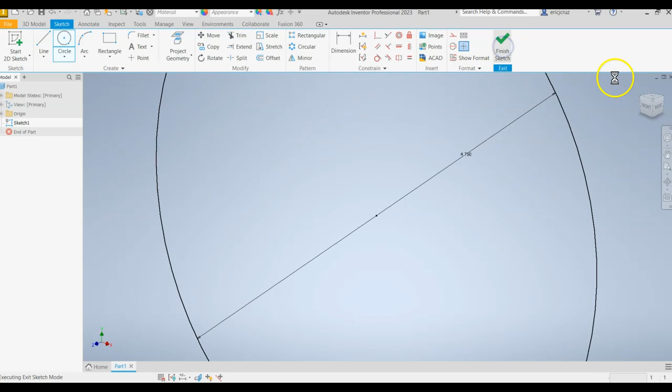I'm going to click Finish Sketch, click Home, and extrude that by its thickness. My menu popped up on the wrong side, and that thickness, distance A, is 0.62. Click OK, and now you have the base.

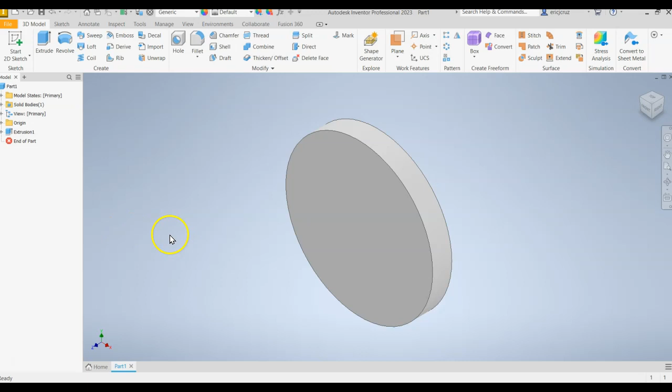Let's go ahead and cut out that hole in the center. Right click New Sketch on that surface, click to draw a circle, and that circle is 1.37. Go ahead and Finish Sketch and Extrude Cut through all.

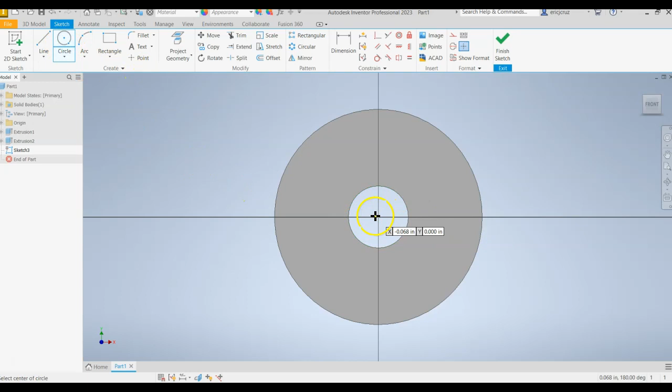Again, New Sketch on that surface, and this time we're going to click Point. So find the point, and from the center out we're going to click Circle. We're going to click on the center, and that circle, this new circle, is going to be 3.38, and this is the alignment circle for where we're going to put points.

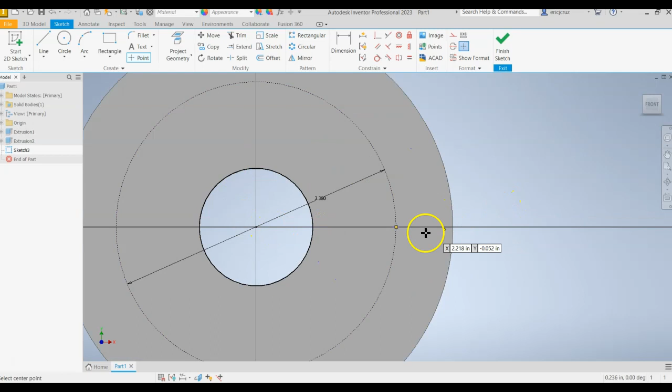Right click on that circle and click Construction, and it'll get dashed. Now click Point, and then click where it aligns with the center. If it doesn't align, click on that point again and click on the center, and it should align. It's hard to see on screen because it's so small, but that point should be horizontally aligned with the center mark, and it should be 3.38 in diameter along here.

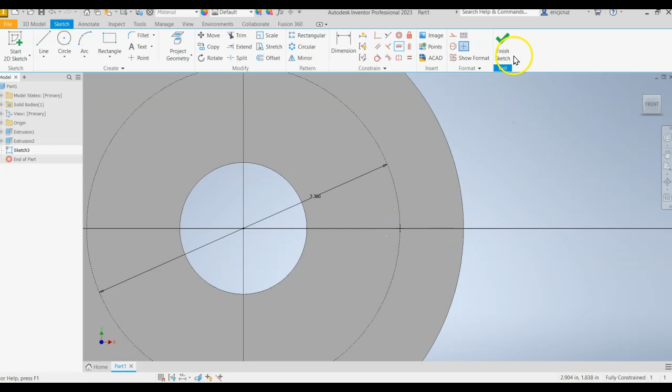Now I want to show you something called the circular pattern. I'm going to click Finish Sketch. Now you only should have one point, because I want to teach you a skill.

Before we do that, let's go ahead and click Hole. You'll notice on the technical drawing it says 0.38 through with a 0.75 counter bore, going 0.30 in. So that counter bore is here, this diameter right here is the 0.75. Then the distance, the little arrow pointing down, is 0.3. And the diameter for the hole going all the way through is 0.38.

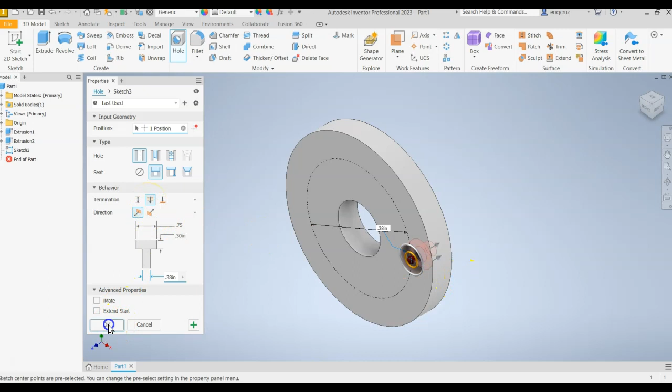And yep, it should say through all. I'm going to click OK. I'm holding Shift and I'm clicking. So that's what it should look like.

Now, the part I wanted to show you was this button right here, Circular Pattern. I'm going to click Circular Pattern. It lets you click on the feature, so we want to click on this feature, and then you have to click on this button that says Rotation Axis. The rotation axis is going to be one of the circles, and you'll notice it's trying to put a pattern here, and it says Placement. So we only want 3, we want to add 2 extra.

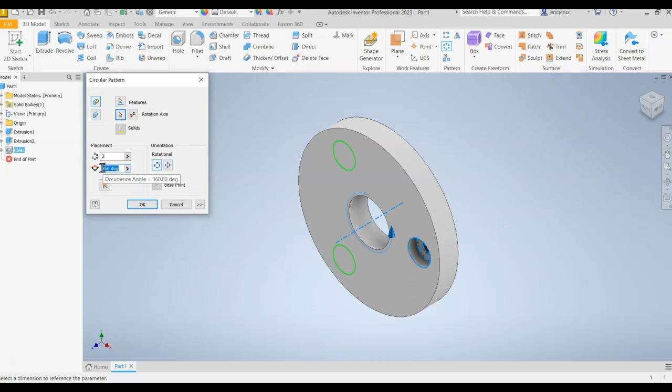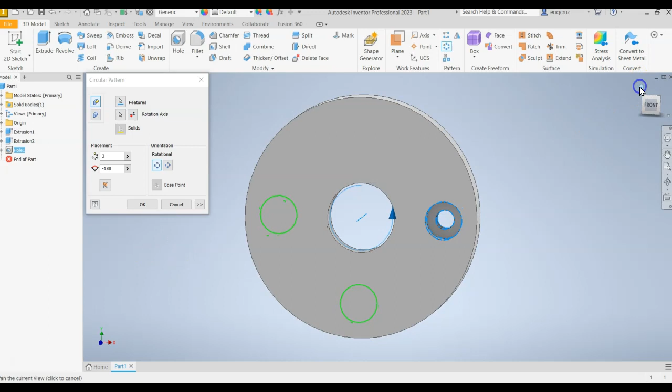3. And the angle, I believe is... let me look at that. Yeah, there we go. Depending on which way this is going, it's either going to be 180 or negative 180, because we want that feature aligned with this vertical and then aligned horizontally on this side. Click OK, and now when I click OK, you'll see it pops in those features.

So that is circular pattern. You should definitely know how to use that. It comes up in the NOCTI exam. It comes up in the Autodesk Inventor exam.

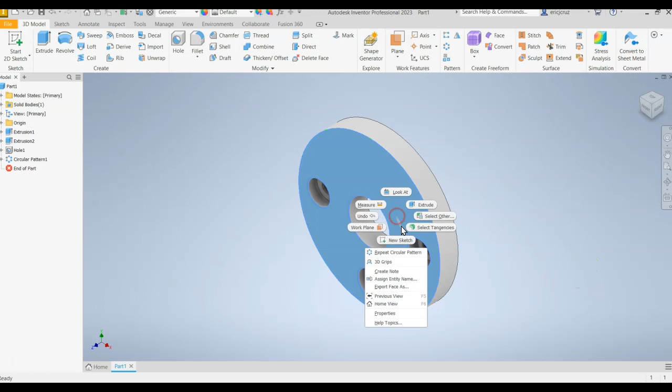Now we can move on by making some of the other parts. Go ahead and click New Sketch on that surface again. We're going to project the geometry of the surface. I'm going to click Circle, and the outside diameter of this circle is going to be 2.

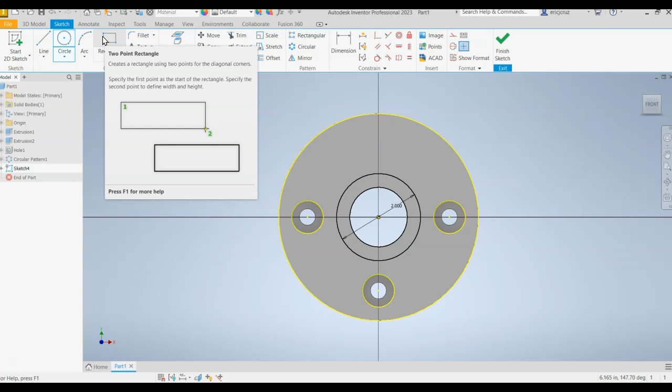And then I'm going to actually, yeah, just leave that like that. So finish sketch. We're going to extrude that ring shape outward, and we're going to do some subtraction here. Well, actually, we know what it is, just 2.

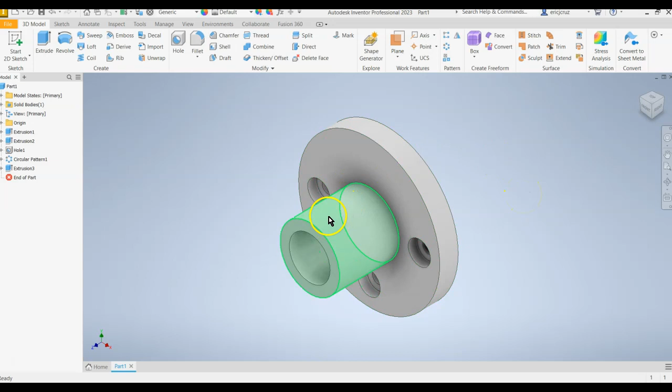So now that you have that cylinder extruded, we can go ahead and cut out that keyhole shape from the backside of the plate. We're going to right click new sketch on the backside, and we can project the geometry of the surface so all of these circles are highlighted.

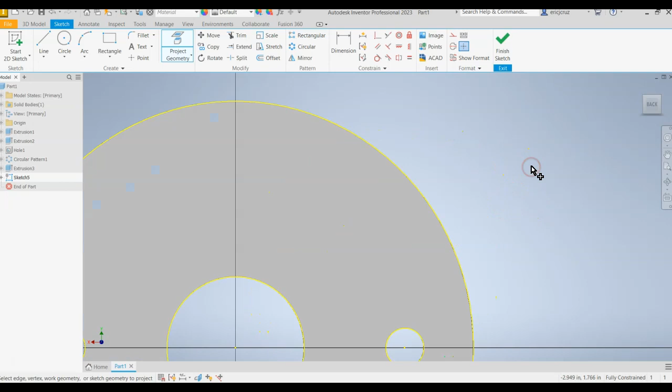Here's where things get a little tricky for this part. Click on the rectangle tool and draw a rectangle like that. Then click dimension, and the length between the two sides is going to be 1.12. And then from the center mark to the top of that rectangle, it's going to be 1.24.

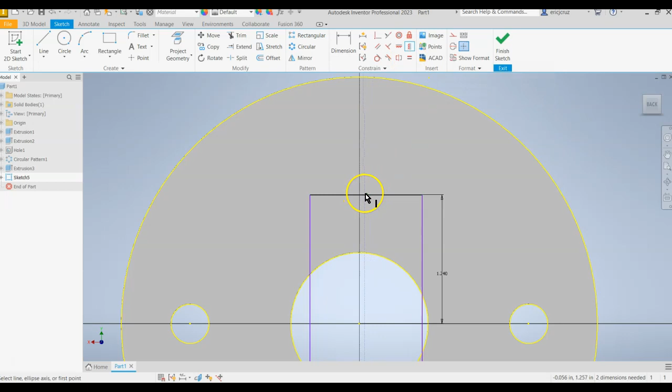Okay, and then we need to align the midpoint. So I'm going to click on vertical align, the vertical constraint. Let the mouse highlight the middle constraint, I'm going to click on that. And then the center mark, and it should snap it into place, just like so. I'm going to tap escape.

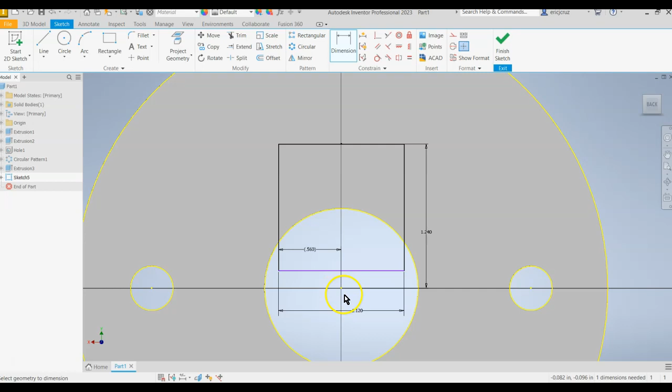Okay, so you should have this shape right here that's going past the circle. And if that did not work, click dimension, click on the side here, and then the center mark, and that should be 0.56 from the edge to the center mark, with a total length of 1.12 and a height of 1.24. The radius, we're going to put that on as a fillet afterwards.

And then we have a circle. So what I did was I clicked circle, I let it snap to the midpoint so I get that vertical alignment, and then click above it. I need to change this to radius. I'm going to right click and click radius, and the radius for this is 0.24.

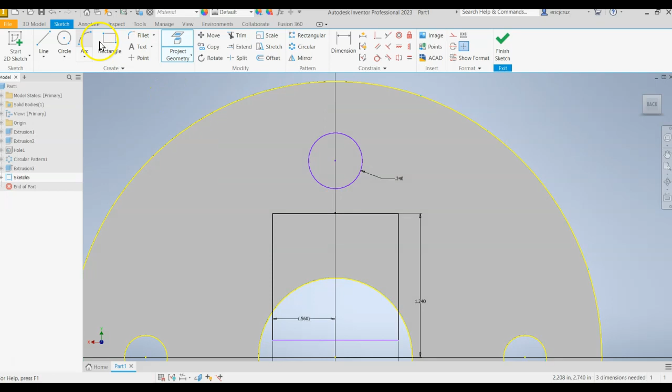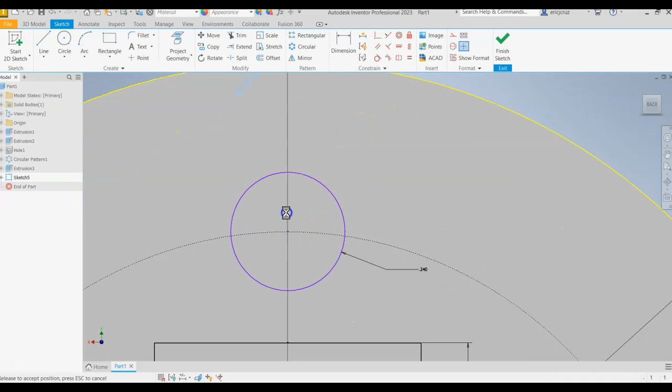Let me click on project geometry because it looks like I lost my line. That 3.38, I need that back. So I'm going to draw a circle, make sure that that dimension is 3.38, except I'm going to right click on it and tap escape. Oh, look at that, so this should snap to right here. Okay, if that didn't work, click dimension, click the circle, click the center mark, and that should be 1.69.

Okay, and now we need lines. So we're going to need some vertical lines. Make sure they're vertical, and make sure they're tangent to the circle. I click line tool, draw line, click the tangent button, click this line, click the circle. That circle should not move from that position.

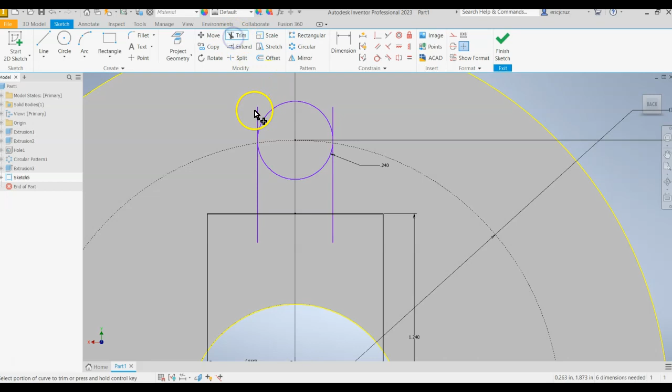I'm going to click trim. I'm going to trim off these lines because we don't need them. Oops, click trim. There we go.

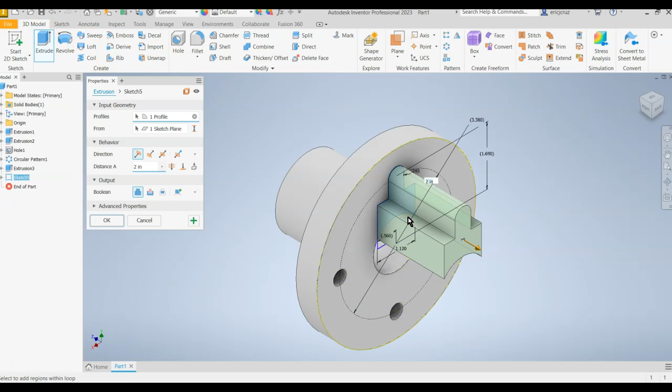Alright, so now our shape is complete. We're going to click finish sketch. I'm going to click extrude, click on that shape. I want that whole shape because it's going to cut through, it needs to cut through that circle there. And I'm going to click cut and through all, and click OK. And that's what it should look like.

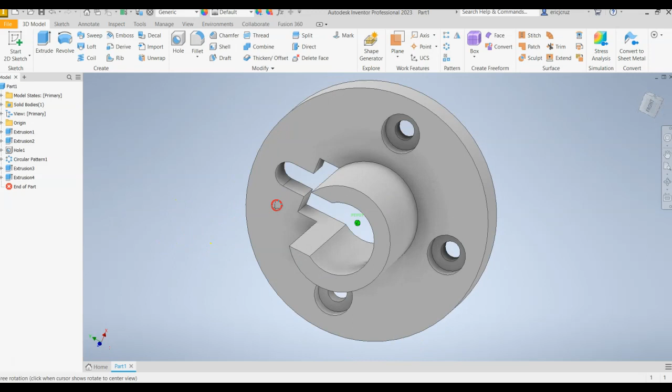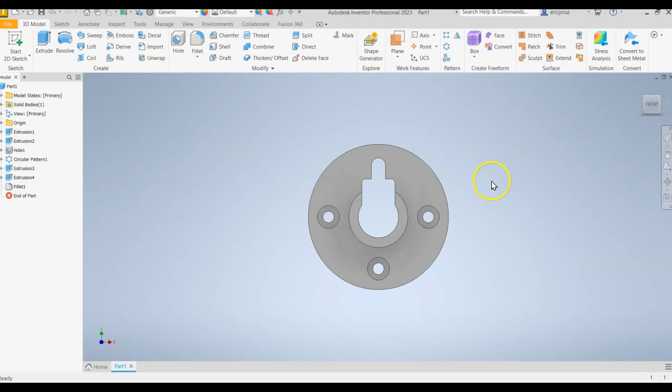Except for these inside corners, they're going to get a radius of 0.12. So I click fillet, type 0.12, and click these inside corners. Click OK. So your front view should look like that, your side view should look like that, and your top view should look like that.

Okay, I broke this video down into a lot more steps than normal, just to show the entire process. If you were to break it down into simpler steps, let's see how many sketches did I have. I'm opening up the model bar. I have 5 sketches, it took me 5 sketches to make this. In reality, it could have took me maybe 2 or 3.

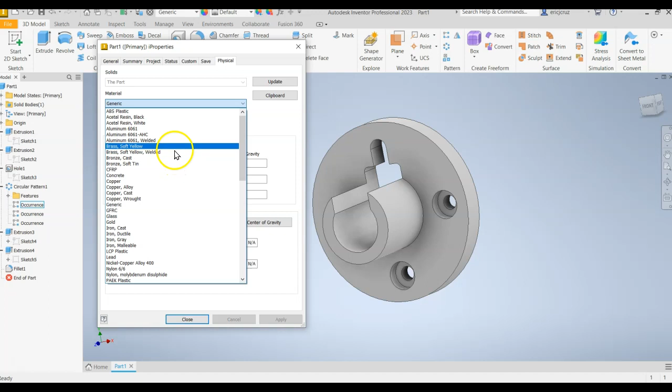Okay, so go ahead and change the material. Go to File, iProperties, Physical. For this one, I want it to be aluminum 6061. Apply, close. Go to File, make sure you save it as centering bushing. I'm going to name it V2 because it's the second time I make this.

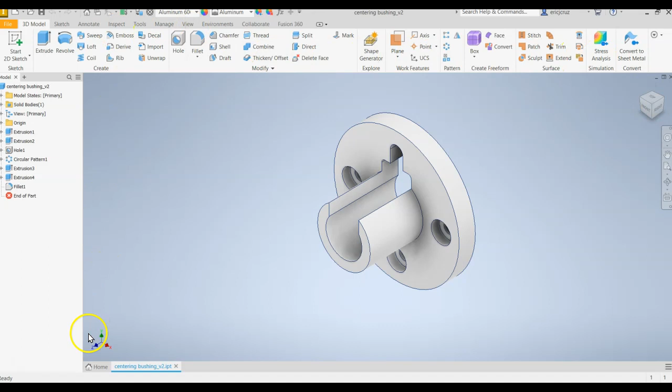And then I'm going to open up my technical drawing so that you can see it. Alright, so I'll provide the example here. This is what your technical drawing should end up looking like. Make sure you use scale 1:1. I want to see all of the details, all of the correct dimensions, and your parts list as shown on this technical drawing.

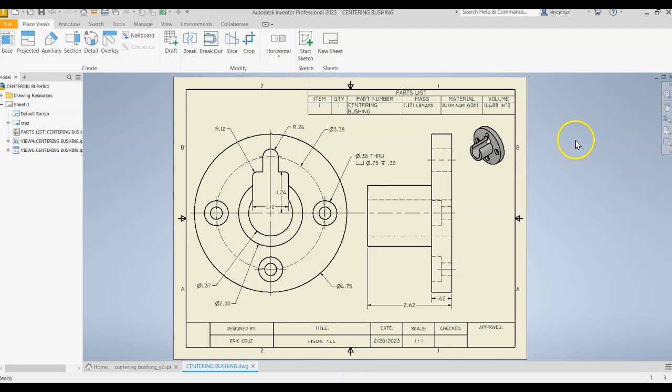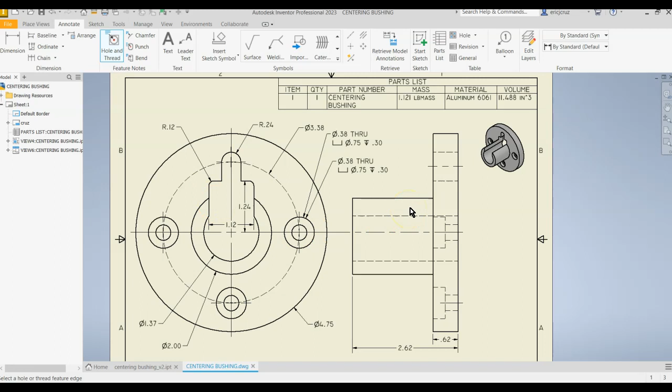My title here is different, I want you to write centering bushing for your title. This is figure 7.44 from my engineering textbook, but do your best to make your drawing match my drawing. The isometric view is in quarter scale, so that's a note that you should remember. To create this note right here for the hole, let me show you how I did that. In annotate, I clicked on hole and thread, then clicked on the outside diameter, and it does it automatically for you. If you have any questions or get stuck, make sure you ask for help.